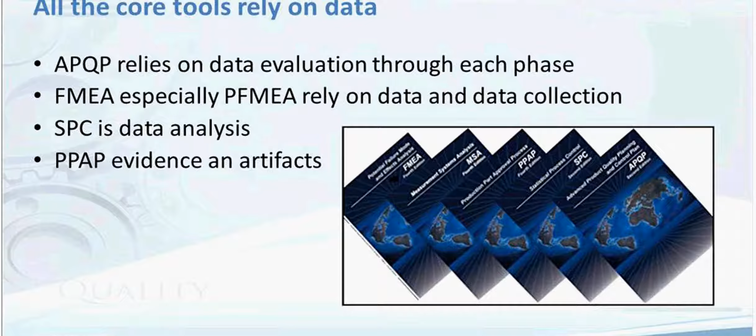And then PPAP, the final submission, our part submission for approval from our customer, requires evidence and artifacts that our data is accurate and precise, and giving them the information that they need.

Our major requirements in relation to ISO and IATF all directly look at areas of measurement. In ISO 9001, what needs to be monitored, methods of monitoring, measurement, analysis, when is it monitored and measured—all of these are critical.

ISO 26262, which is functional safety, relies on the ability to react to data and information that's being collected off some type of measurement device or measurement system within a circuitry. And IATF 16949 has clauses, specifically 7.1.5.1.1, that specifically call out measurement system analysis. So in all those areas, it's critical that we have a system of measurement that's reliable.

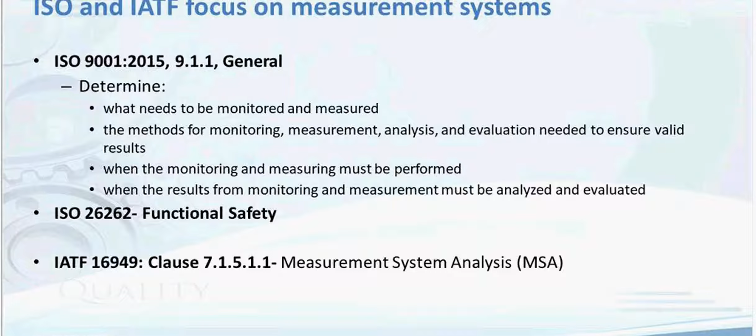At what time should measurement be considered? In reality, measurement of a part starts right at the conception of the design itself. So as we start to develop the design, the product engineer, understanding the function of that part, is going to put information down in the CAD or print area of how this part is going to be measured.

The engineer, knowing the application of the design, establishes datums to secure where that part's going to be held and how it's going to be measured. And all of this is through geometric dimensioning and tolerancing.

There was a period of time where companies started getting away from GD&T, and the problem when you do that is that if the manufacturing and quality people don't have direction in relation to how the part's going to be measured, they'll do it the way that they need to do it, whether it's for manufacturing or the easiest way to clamp it to measure it from a quality perspective. So it's very critical that the product designer establishes how that part's going to be measured.

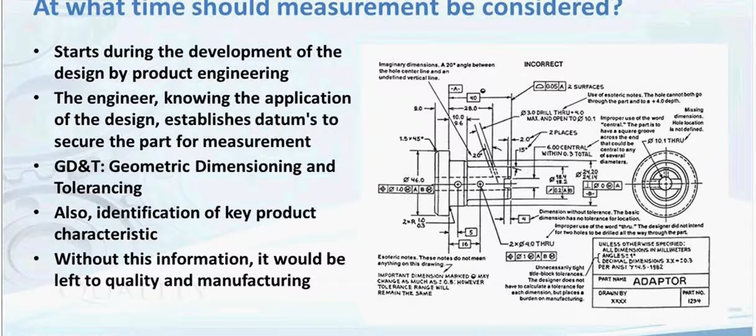Going through an example, when I first started working at General Motors in Lansing in the engine plant, it came to our realization of how critical datums are. If you look at this example with the engine block, the datum for an engine block, all the characteristics in the engine block - the cylinders, the cams, everything else - are all related back to the datum, which is the crank line.

But when they're manufacturing the part, all the dimensional information is being related to the pan rail. Pan rails are where they mount the oil pan on the bottom of the engine block. Why was that done? Well, because it was a flat space, and when you put that flat space on a manufacturing rail, you can just slide that heavy engine block down the line.

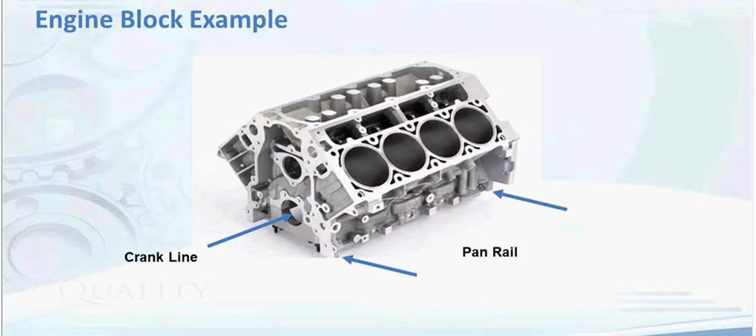Now you can see how that could be an issue if the datum is actually the crank line, and the pan rail actually has to become a critical characteristic of the engine block, because then when it's being measured and being manufactured, it's going to be done incorrectly. So it took a while to come up with a solution to this, but when I first started working at the engine plant, everything was being manufactured to the pan rail.

So what's a measurement system? A measurement system has some level of input, some operation, and output. The key process output variable is a deliverable of information that's used for making a decision on the product, process, or service.

So trying to not just focus on the gauge itself, but to focus on the whole measurement system is what's important - that there's some level of input, some output, and some operation that potentially could be done on the product.

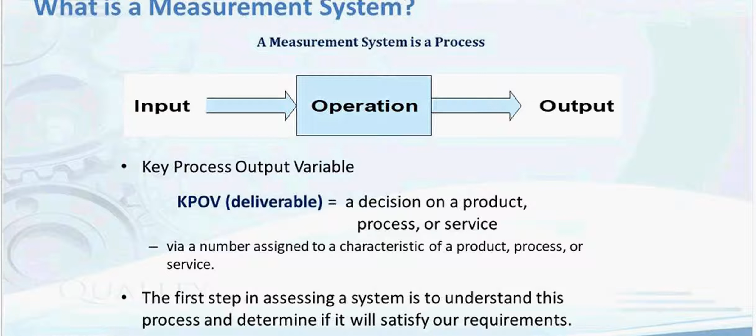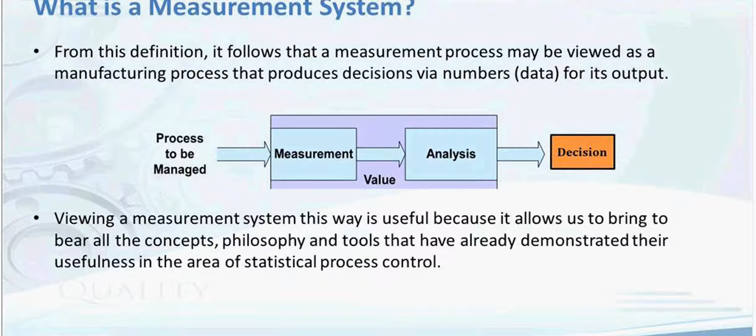From the definition, it follows that a measurement process may be viewed as a manufacturing process that produces decisions via numbers, data, for its output. So we have some process that needs to be managed. We take some measurement, there's some value that's created, and then somebody makes an analysis of that information, and a decision's made. So in all those areas, there's potential for risk and error.

Looking at this measurement system example, to measure the outside diameter of the tube, we use a system that includes the item of interest - the part that we're measuring - the person who's taking the measurement, so there's some person that's involved, the method to use the equipment, and the environment where the measurement is being performed. Do we have proper lighting so they can see what the increments are?

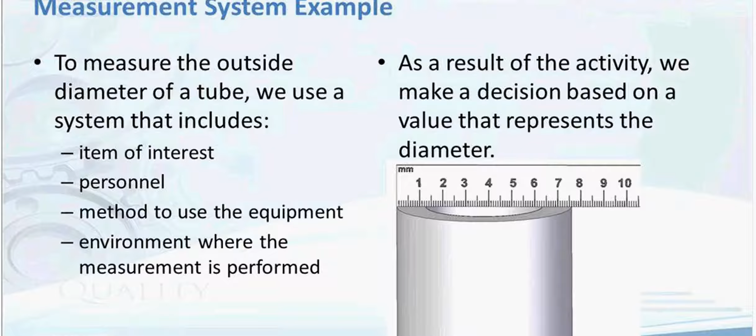As a result of this activity, we make a decision based on the value that represents the diameter. Now you can see a lot of issues that could occur with this example in relation to how the scale is being held, the number of increments that are on the scale, the point that they're taking the measurement. They could take an infinite number of measurements of diameter by rotating the tube.

So once this measurement knowledge is obtained, we say, well, how big is the measurement variation? Do we have so much measurement variation? Is it capable for the usage that we're going to be using for the data? Is the measurement system stable over time? That's probably one of the most overlooked analyses of measurement systems - measurement systems can be unstable, where you get unstable results.

I had a person that worked for me in Lansing that was checking all of the gauges coming into the 3800 plant and found out that 1 out of 10 of the gauges that were coming in fresh out of the box were out of control. They're unstable, and he returned them. There was something incorrect in the gauge when it was assembled that caused it to be unstable.

Again, what are the sources of measurement variation, and how do we improve the measurement system to make it better?

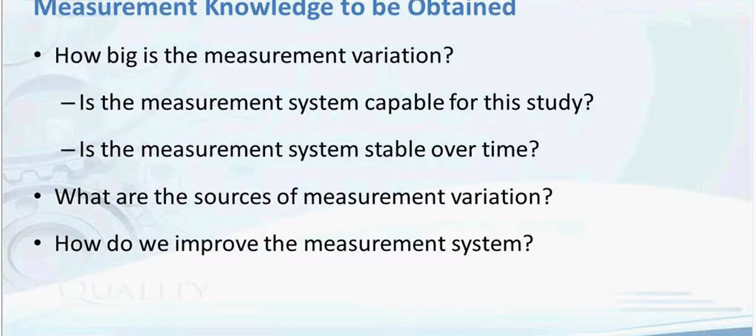Measurement system is a process of test and method and specification. It's also personnel, the operators, how have they been trained to use the gauge, their ability to use the gauge.

It's also the tooling equipment, the gauges, fixtures, test equipment, and calibration. I would say over 30% of the issues that I had with problems in manufacturing turned out to be fixturing problems with the gauge.

The biggest fixturing problems that I found normally were in coordinate measuring machines. I found a lot of issues with Zeiss coordinate measuring machines where you had this very expensive gauging system and a poorly executed fixture. Or they were over-clamping the part. So clamping, pressure, fixturing, that's all put together.

But before I would ever start to do any level of problem solving, I would always evaluate the gauging system for gauging variation, and I would focus on how the part was being fixtured, going back to the print to see what datums were defined by engineering.

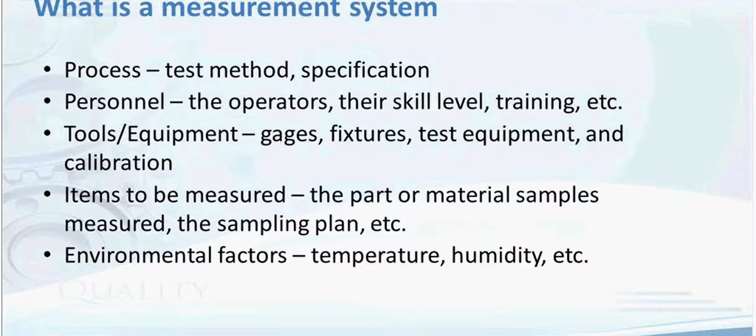And then environmental factors, temperature and humidity. Over the years, this became such a big issue. At GM, I had them buy me a portable machine that would measure temperature and humidity during the test I'd be running out in the plant. I found a constant issue with temperature and humidity when it comes to measurement, especially when you're getting down into the microns.

So what is MSA? MSA is a measurement system analysis. It primarily deals with analyzing the effects of measurement systems on measured values. The objective of MSA is to assess the quality of the measurement system.

In actuality, if you go through the whole MSA manual, it covers a lot of other areas in relation to tracking back to standards, the traceability of our gauging systems, and the purchasing and validation of gauge and measurement suppliers. A lot of that information is covered in the MSA manual.

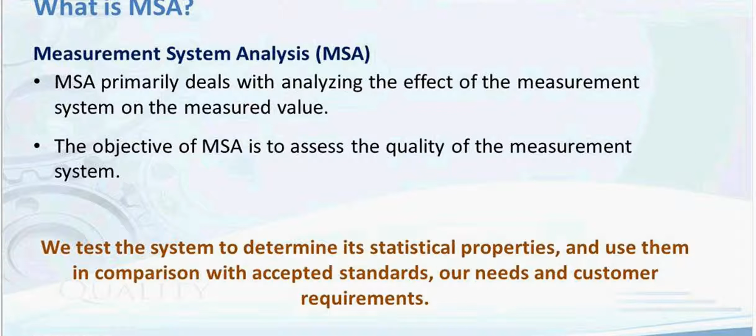So MSA is the control of gauges and fixtures. The proper qualification of gauging and test equipment requires the use of statistical procedures to analyze the inherent variability observed in the use of this instrument.

So some method needs to be used to try and qualify whether there is a minimal amount of measurement error. Additionally, before a capability study can be performed on any machine or process, you need to validate and qualify the measurement system.

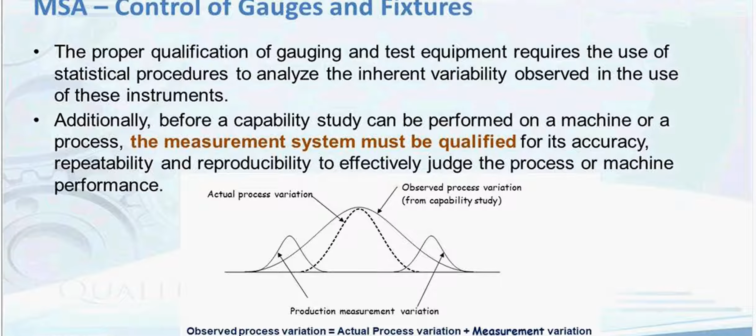So the idea here is there's two ways of reducing overall variation. We can either improve the process, or we can reduce the measurement error and improve the measurement system.

So anytime I went into a problem situation, the first thing I would do is evaluate the measurement system to make sure that my measurement error wasn't what was causing the problem. And normally it's a lot cheaper to make improvements to the measurement system to reduce the measurement error than it is to make process improvements.

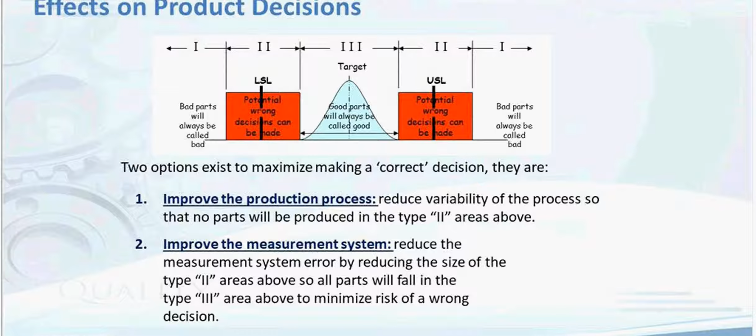So I'd usually start with the gauging system first. The best-in-class approach is that determination of these fundamental issues is most meaningful if made relative to process variation.

If you are familiar with using gauge R&R, for example, or gauge repeatability and reproducibility, it gives you an option to either compare the gauging error to the spec range or in relation to the process variation. In reality, it's better to do it relative to process variation, because especially if you start reducing the process variation under 50%, you may get to a case where your measurement system is not effective for that reduced variation.

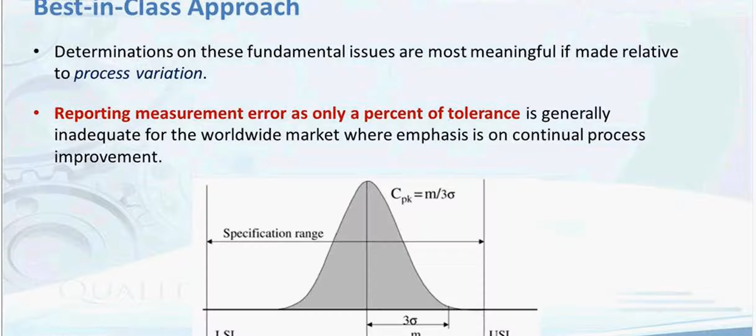So you may get a case where it's acceptable for the range of the specification, but not acceptable for the reduced variation in the process, which then makes it an issue in relation to doing statistical process control and continual improvement of the process.

So I'm not going to go through all of this in detail, but in general, the statistical properties of measurement systems start out with discrimination and uncertainty, and then bias, linearity, and stability, the variation, which is the gauge repeatability and reproducibility, and then if there's attribute measurements, that's an additional area of analysis.

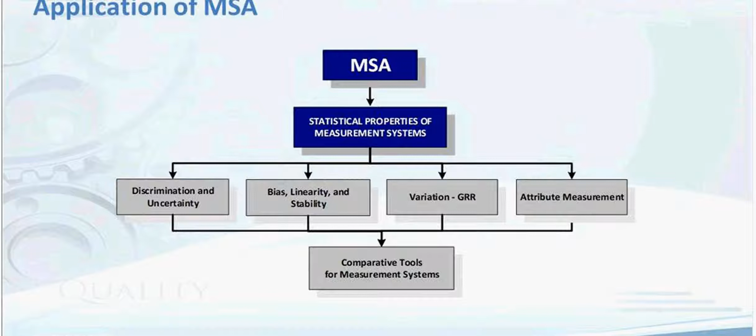So if we had a lot more time, we could get into more detail of all this information. Again, when we're talking about measurement systems, I like to highlight the IATF 16949, the 7.1.5 sections 1 through

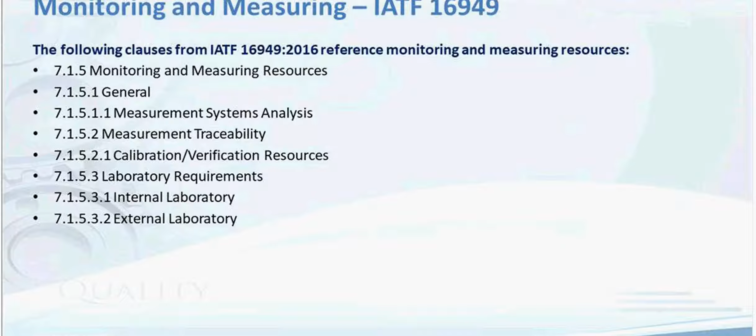3, all are related to measurement systems and the importance of understanding the measurement system. So the biggest thing to accept is that measurements is not always exact.

When somebody's presenting information at a meeting and they're telling you these are the results that they got on their study and are recommending that changes be made, you should ask them what the measurement error was in the device that was used to collect that information. A lot of times we sit in meetings and just blindly accept data that's presented, assuming that there's no error in the measurement device. I would be concerned if a person couldn't tell me what the measurement error was.

When we look at measurement error, it can be classified as, first, if we have a gauge where there's a dial or some type of measurement that we have discriminating tick marks on it, then the discrimination could be an issue.

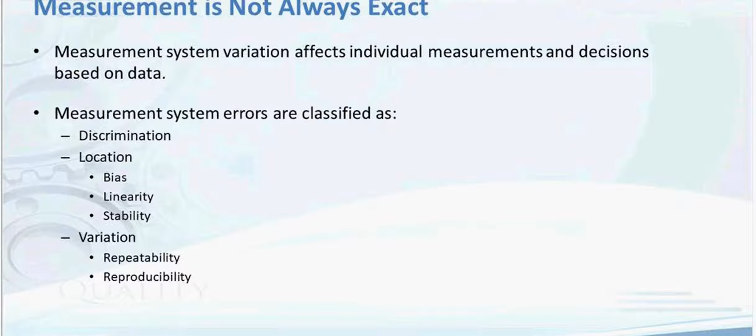Then the other breakdown is location. Location is broken up into bias, linearity, and stability. And variation is repeatability, or what would be considered basically the device's repeatability itself. Reproducibility talks about the measurement system's interface with the operator, and is there any issues with the interface between the operator and the gauge.

So again, this gets into discrimination or resolution. This used to be a big deal years ago because most of our gauges had dials and indicators on them. You don't see it as much today. Even calipers are digital, and they went to digital to get rid of a lot of this discrimination issue.

But if you have a gauge where there are marks on it that are being used for discrimination, there are rules for how many marks and discrimination you should have. So I'm not going to get into that. If you have a gauge, you can check into that into the MSA manual.

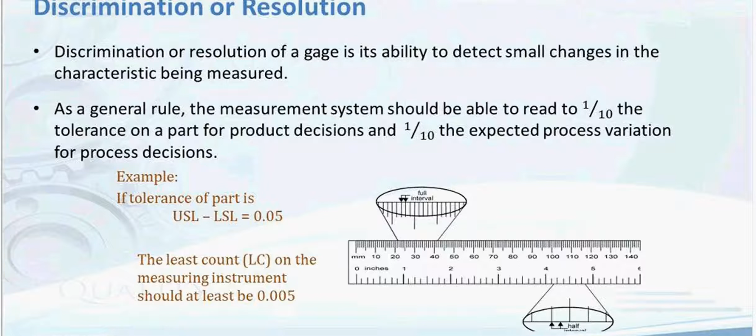Measurement's not always exact. There could be some level of bias, a difference between what the gauge is telling us the value is and what the reference value is. Usually this is the reason that we master, calibrate our gauges at the beginning of a shift, is to see if there's been any shift in the gauge or bias of the gauge, and we make an adjustment to zero the gauge out.

Now, what should be done is bias should be something that's tracked over time. A lot of times we think we resolve it by just having somebody master the gauge in at the beginning of the operation, but if you have to do that frequently, that becomes an issue.

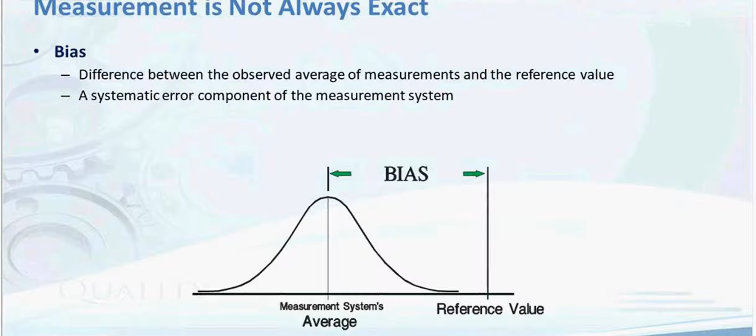That there's some problem with that gauge, is if it's drifting. I would expect it not to be needed to be adjusted for bias for a period of a couple days or so. If it's every single shift it seems to shift, it could be an indication of a problem with the gauge.

Linearity is looking at bias over the extent of the operating range or the specification. As I go across the specification, I shouldn't see a change in the level of bias.

Linearity is what I've seen over my experience is that you don't see as much linearity issues with mechanical gauges as you do with electronic. So if I have an electronic gauge in the plant, I'd really want to look at it for linearity. Mechanical gauges don't seem to be as having as big an issue with it, but electronic devices, especially when they're in the plant environment and the plant environment has a temperature that's not controlled, you could have issues with linearity.

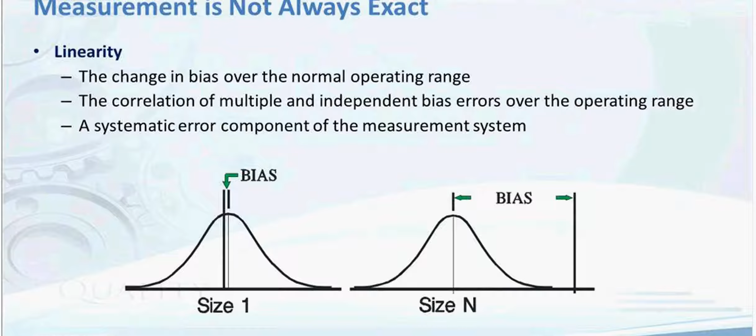Probably one of the bigger ones that gets overlooked is stability. Over the years, I've seen a lot of examples where gauges had very good gauge R&R values, but they were unstable.

When you look at gauge R&R, look at it as a single point capability analysis. It's not going to tell me how that gauge is going to operate over time. It's just telling me how that gauge was operating at the time I did the gauge R&R.

So there are some gauges that have problems you can't pick up unless you do a control chart on the gauge. Normally, control charts on the gauge are where I take some master and put it in several times. So at the beginning, when I'm getting ready to pull a sample, I take the master and put it in 3 times, take the recording of those 3 measurements, and put them on a control chart with an average and a range.

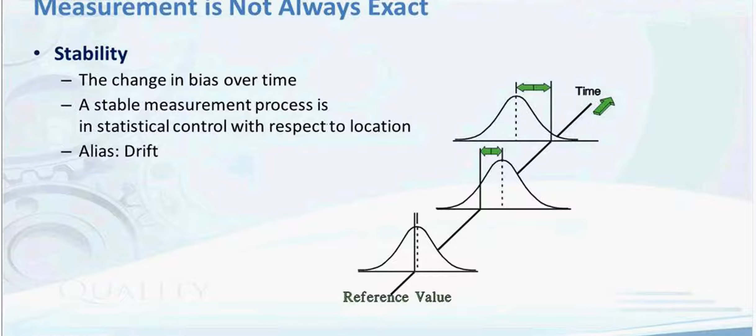But that control chart, I would do stability checks on, especially on key characteristic gauging. I wouldn't do it on all gauging, but especially it's important to do it on gauges that are measuring key characteristics.

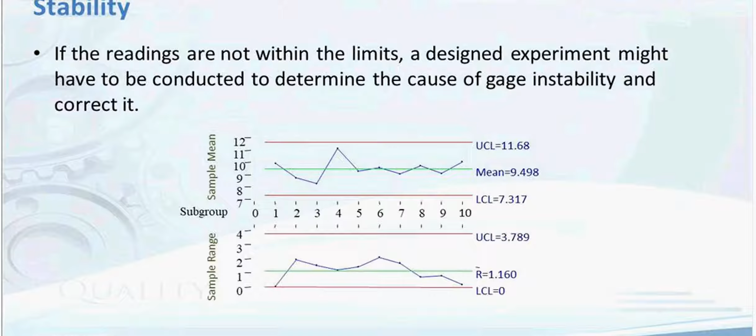Again, you would read the control chart. The control chart for this example doesn't really show what a gauging control chart looks like, because it looks pretty flat. There could be some hugging of the center line, or cases where there's a lot of zeros in the range - it's not as pretty as this chart. But you would do it on a control chart, and if you see some point that was out of control, you would evaluate the problem.

Repeatability is just taking multiple measurements on the same part, and that's why it's called equipment variation. Repeatability can be done really quick on gauges just to check and see if the measurement system can measure the same part and give me the same results off the same part multiple times.

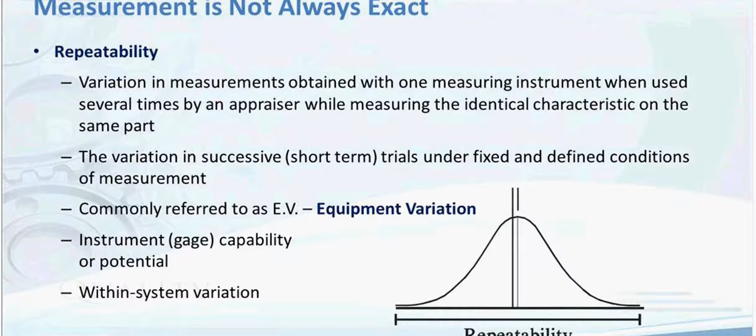So it's called the equipment variation, and the other part of it is reproducibility, and that's where we're having different inspectors or appraisers measuring the same part several times and seeing if there's differences in the different appraisers.

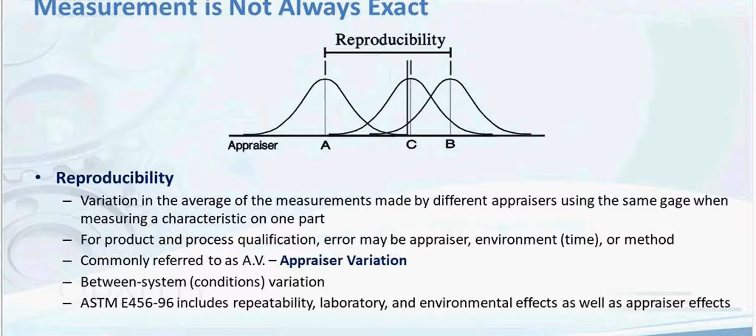So you never know, but we use this information with any gauges where we're having operators that work with the gauge. As a side note, when you look at gauge R&R, there's 3 operators. The reason that was set up for 3 operators is most plants were running 3-shift operations - an appraiser on days, an appraiser on afternoons, and an appraiser on midnights. If you're doing a gauge R&R, you'd have to run the day shift gauge R&R with the day shift appraiser, then go to afternoons, then midnights, and pull the information all together.

Gauge repeatability and reproducibility studies are pretty intensive and take a lot of time, just because of the logistics.

So ideal measurement systems produce correct measurements each time used, and each measurement agrees with the master standard. We have the statistical properties of zero variance and zero bias, consequently zero probability of misclassifying any product measured. So in saying that, there are not many ideal measurement systems.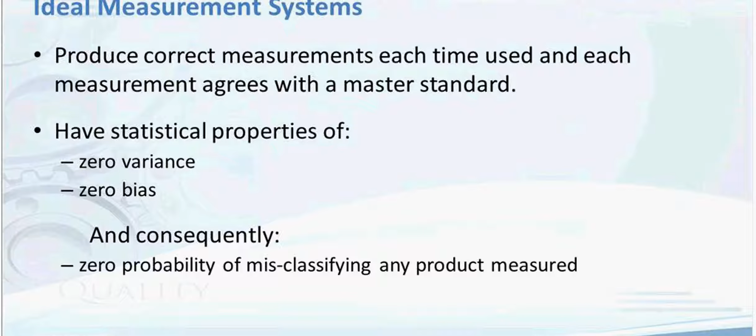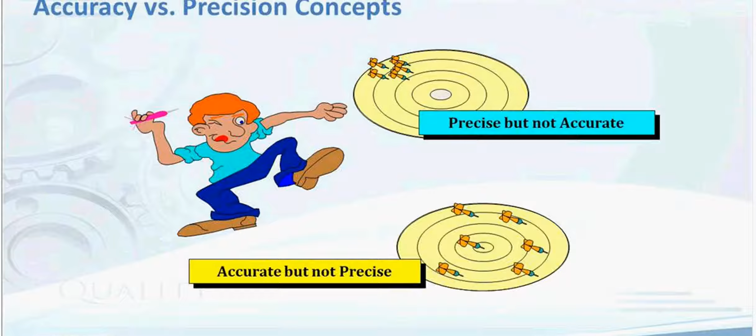Normally, we're looking at measurement in relation to accuracy and precision. We'd actually like to have it both accurate and precise, or in the center of the target. So we look at accuracy and precision.

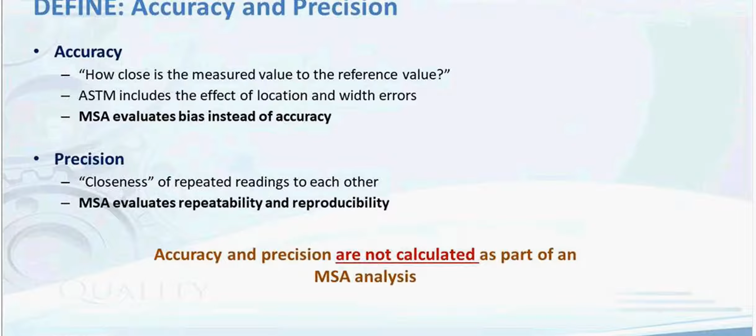That's normally what's evaluated when you have somebody come in and certify your gauge. So when there's a label on the gauge - if you're auditing a company and they have a placard on the gauge that says it was certified 2 months ago - it's normally certified for accuracy and precision, and so it's not part of the gauge R&R analysis. It's part of the normal maintenance of the gauge in a normal review of the gauge.

So in most cases, I'm assuming that if a gauge has been certified and hasn't been moved, its precision and accuracy have been established by some internal or outside source.

...environment, methods, and machines that can affect the actual results of the measurement. I really stress that gauge R&R is a very minimal level of analysis of a gauge. As we look at measurement systems, we should be thinking how that measurement is going to be used, and where it's going to be placed when it's put in the plant. A lot of gauges that we had at GM eventually ended up in a gauge crib or enclosure because of the impact of environmental temperature and humidity on the measurement.

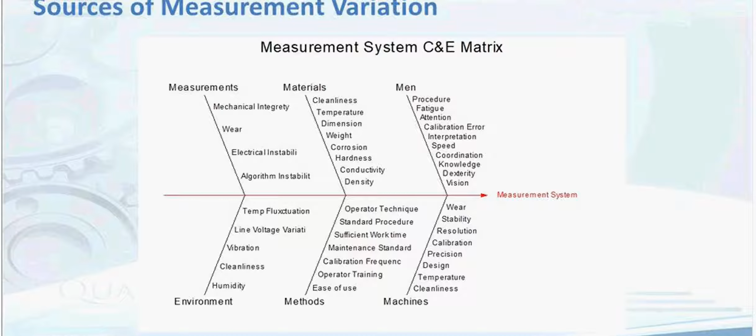So again, environmental effects on data: temperature could cause expansion and contraction of the part. Think about a piston made for an engine, made out of aluminum, and they're machining it down into microns.

If I have poor lighting, it could affect my ability to read the gauge or use the gauge. I've been in some plants where it seems like you're walking into a dark cave and they're trying to do measurement in that location. It's not very effective.

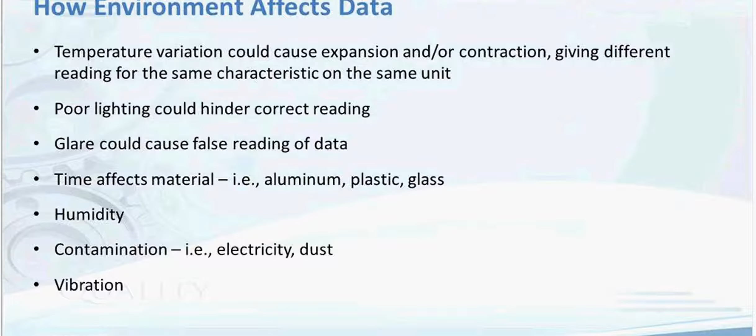Glare could cause false readings, time effects on the material, humidity, contamination, vibration. There's a lot of work done when you put a Zeiss coordinate measurement machine in a plant, where they isolate the whole enclosure so that as forklift trucks drive by, it doesn't cause vibration that affects the measurement.

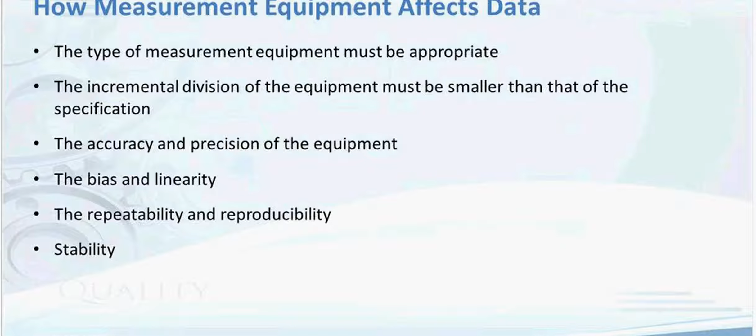So we look at the measurement system, the equipment: how does it affect the data? The type of measurement equipment must be appropriate. The increments and divisions must be smaller than the specification. The accuracy and precision of the equipment could affect how good the data is—bias, linearity, repeatability and reproducibility, and the stability of that gauge. All of those we need to be concerned about and focused on.

We can't overlook the fact that proper work instructions are needed. I'm going to be talking about an example at the end of this presentation that will highlight that, but you have to have good work instructions. You have to have visuals. There's got to be a set procedure in relation to how the gauge is used, how it's calibrated, and how the samples are prepared before they're measured.

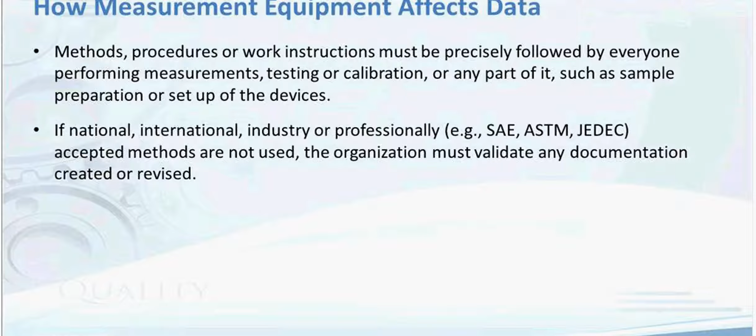If a national or international industry or profession accepted method is not used, the organization must validate any documentation created or revised. Any of those things have to be approved by a customer. Normally you've got to be following national or international standards to get into manufacturing nowadays.

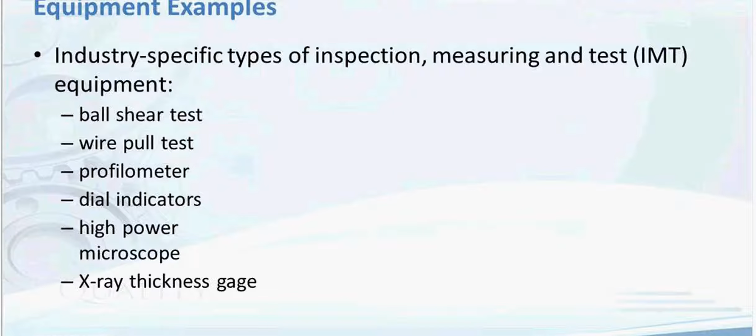So there's a lot of different ways tests are done, different types of measuring tests. You have shear tests, wire pull tests, dial indicators, high-powered microscopes, X-ray thickness gauges, comparators. The list goes on and on.

From a mathematical perspective, what you're really trying to do is separate out the actual process variation from the measurement variation. That's the challenge you have in doing the analysis.

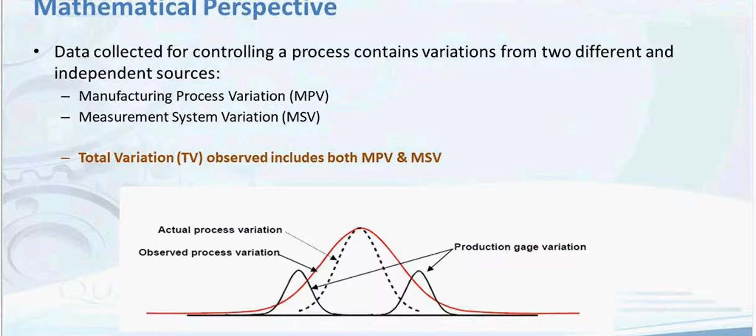You're looking at the difference between the mean of the total—what is the actual product mean, and how much of the mean is being impacted by the measurement system. Variability is the same thing. You have this total variance of the output of the data you're evaluating, and a portion of that is the product, and a portion is due to the measurement.

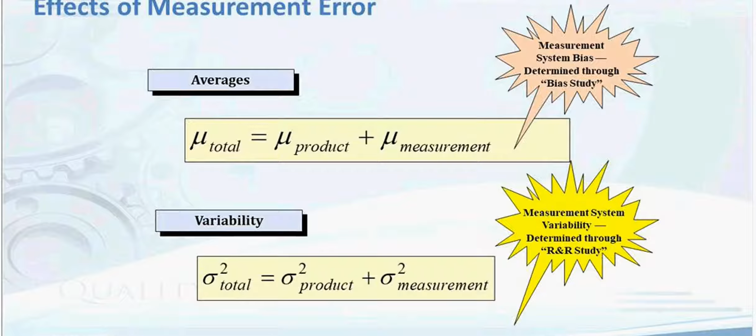You can use manual type statistical methods. You can use the analysis of variance method. You could use design of experiments to evaluate a measurement system.

And again, these measurement errors can affect the capability analysis, and this affects the information that goes into PPAP.

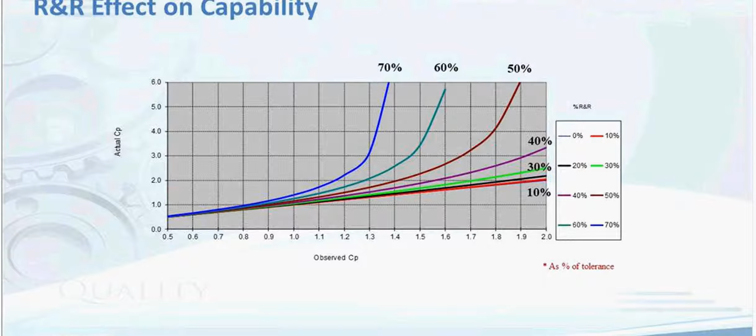So when we evaluate a measurement system, we're concerned about bias and linearity. We're concerned about making sure the capability of the gauge is good, the gauge R&R is good. We want that gauging system to be stable. We need to have that all in place before we do the capability study. The capability study should never be done with gauges that have high gauge R&R numbers—it's a waste of time.

Here's an example. When I first started working at Oldsmobile, my manager—I taught him how to do statistical process control—called me up on the phone. He says, Mike, I must not have been listening close enough. I did my control chart, and every single point on my average chart is outside of the control limit.

So I went to his office, and when I looked at the control chart, the points on the top were from day shift, and the bottom ones were from afternoon shift—day shift, afternoon, day shift, afternoon. So all of the points above the upper control limit were from day shift, and the ones below were from afternoon shift.

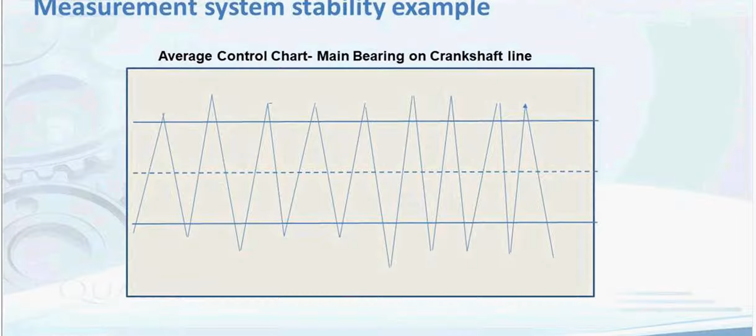So then I went to the plant. Remember, this is coming off of a crankshaft main bearing, so it's not an insignificant characteristic. They were using this column gauge where a bobber floats on air. As the part gets bigger, it restricts the air, meaning more air goes into the tube, so the bobber goes up. As the part gets smaller, air escapes around the part, so less air goes to the tube, and the bobber goes down.

I talked to the inspector on day shift and asked how he used the gauge. He said he reads it at the top of the bobber—that's point A. He said, Mike, those guys on afternoons are screwing with us because every morning we have to reset the process.

Then I went to afternoons, and that guy said he uses the bottom of the bobber—point B. He said, Mike, every time we come in, those guys on day shift are screwing with us. We have to reset the gauge, reset the process every single time. So then I talked to the supervisor and asked how they were supposed to use the gauge, and he said point C.

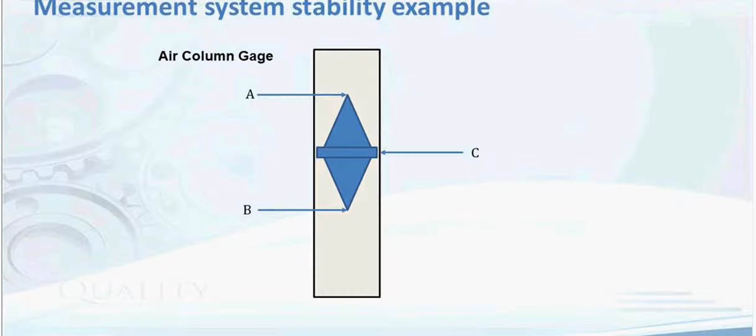The way we resolved this problem is we put a picture up and said, take the measurement from here. It was a simple solution, and immediately the process became stable. So it's very critical for measurement systems. Every company I've worked with has had examples similar to this—it's not unique unless you have a very good company focused on measurement systems. People tend to have too high expectations in relation to how good the gauging and measurement system is.

So in closing, I'm going to close using one of Dr. Deming's quotes: 'It's not enough to do your best. You must know what to do, and then do your best.' If I have a bad measurement system, I can be doing my best to make things better and actually making no improvement at all.